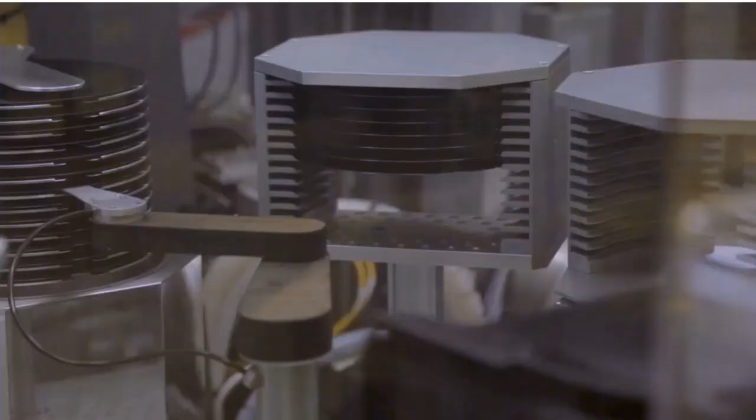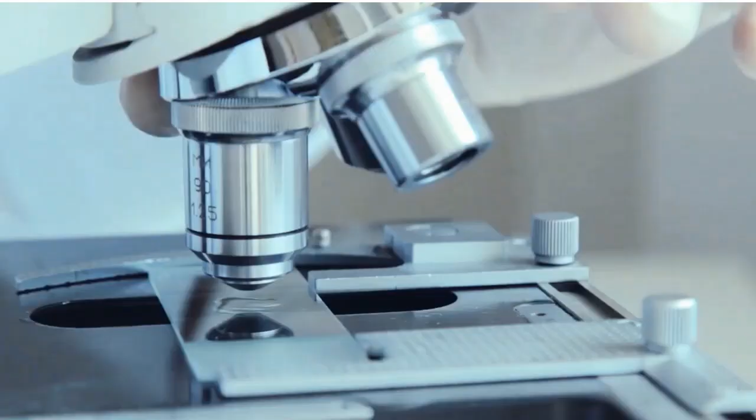We offer a wide range of materials such as glass, electronics, chemicals, and ceramics. And operate in over 30 countries and regions with over 50,000 employees, working to provide essential products for day-to-day life. Our research and development team thrives to achieve a better society and standard of living. At any point in time, AGC has played a part in supporting society, providing unique materials and solutions.

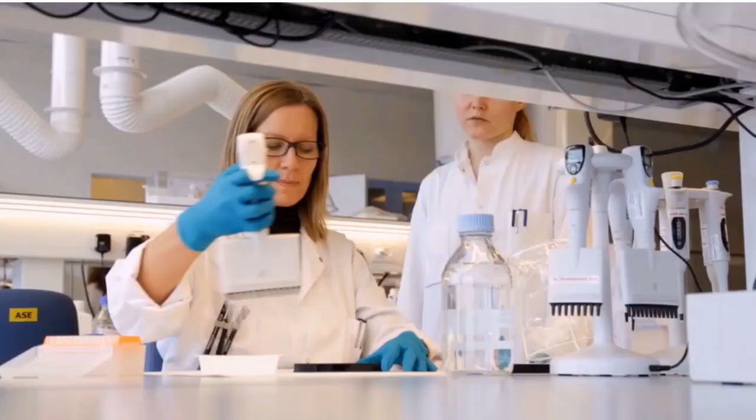Our glass is used in buildings and vehicles around the world. Our chemicals business offers a wide range from daily products such as baking soda to materials used for iconic buildings around the globe. Furthermore, providing solutions to advanced medical care and expected food shortage issues. Our display glass enables clearer images. By utilizing a wide range of technology, AGC contributes to the development of the electronics industry. By providing unique materials and solutions, AGC is always around you, supporting people's lives anywhere in the world. AGC.

AGC Incorporation's mission. AGC has been a forerunner since more than a century now. It is due to the planned mission and vision of the firm that they have always led the market and business. The mission of the firm is to make AGC an essential part of our everyday world. Its unique materials and solutions make people's lives better around the world every day.

AGC aims to be the first choice solution provider for its customers by building a long-term trusted relationship with them. The company believes in shared values among employees and customers. It aims innovation in technology, products and services beyond conventional concepts and frameworks. It is constantly working to improve all aspects of operations and services.

Besides, shared values in diversity, integrity, and environment also hold importance in AGC ideology. Respecting cultural, ethnic, and national diversity has been the main motto of AGC. This helps the firm build open and strong relationships with not only employees but also stakeholders and customers. AGC holds the spirit of never taking the easy way out, but confronting difficulties. This was given by the founder Toshiya Iwasaki and has been handed down since.

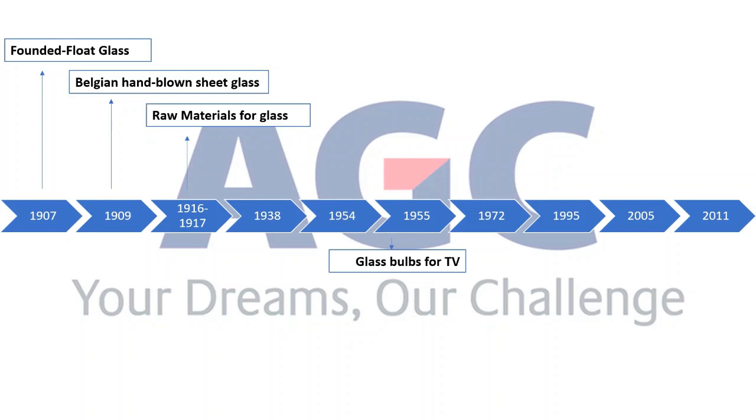Let us now look at the evolution of business and product technologies at AGC Incorporation. When Asahi was established in 1907, only float glass manufacturing took place in the plant. In 1909, Belgian hand-blown sheet glass manufacturing started in Asahi in Japan for the first time. With time, Asahi started manufacturing raw materials required for glass manufacturing, like long-lasting refractory bricks for melting furnaces in 1916, and soda ash production in 1917 when the headquarters were shifted to Tokyo. These new production lines led the firm on the road to being self-sufficient for production of glass.

In 1938, production of tempered glass and laminated glass was commenced. In 1954, the firm started manufacturing double glazing pair glass, an insulating glass of 2 or more window panes separated by vacuum or gas to reduce heat transfer. In 1955, manufacturing of glass bulbs for television picture tubes began in Japan.

In 1972, the Asahi Guard water and oil repellent was developed and has been a trademark of the Asahi Group ever since. Drawing on fluorine's extraordinary properties, these chemicals provide excellent protection and durability against water and oil. In 1995, the production of glass substrate for TFT LCDs began.

Moving to 2005, the sale of automotive glass that blocks infrared rays had gained momentum. With the enhancement in technology, AGC launched the worldwide sales of Dragontrail glass in 2011, used for smartphones and tablets. This glass is also a trademark product of the AGC group.

Further, the next generation automobile refrigerant with low environmental burden, HFO 1234yf, was manufactured and sold by AGC. In this way, from a small separating unit to production of next generation technologically advanced goods, AGC proved to be a pioneer in the market. All this success was possible because AGC ensured that its products not only meet global demand but are also long-lasting and environment-friendly. Let us now look at the management of AGC Incorporation.

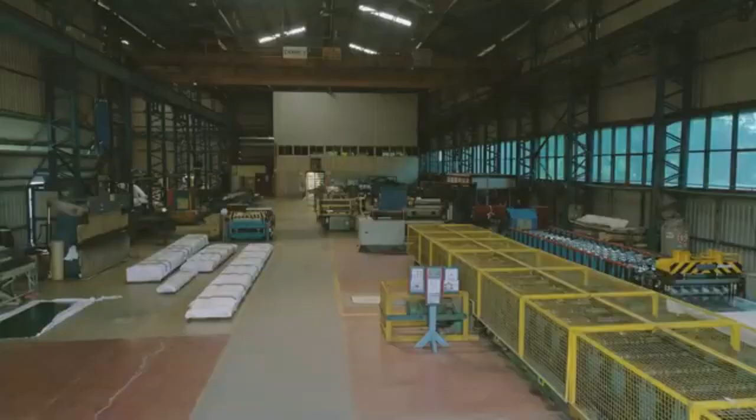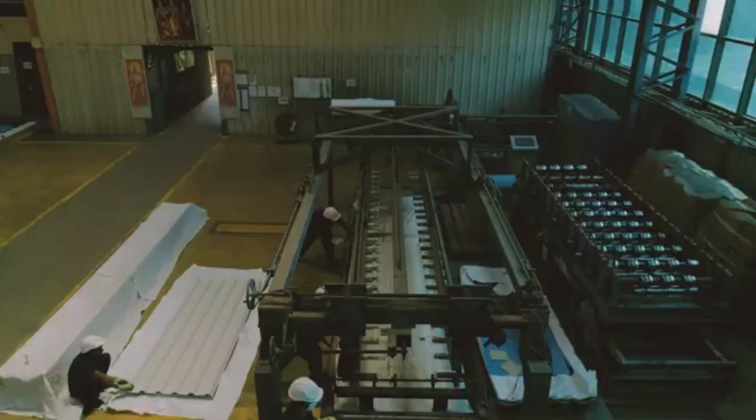Let's take a tour of the Taloja plant. The AIS Taloja plant has installed capacity to produce 550 tons of glass per day, which will help the company increase its overall production capacity by around 60%. According to AIS, the new Taloja plant is extensively and highly modernized, equipped with the latest in glass manufacturing technology. It will have the capability to produce high quality value-added glass for both architectural and automotive glass segments.

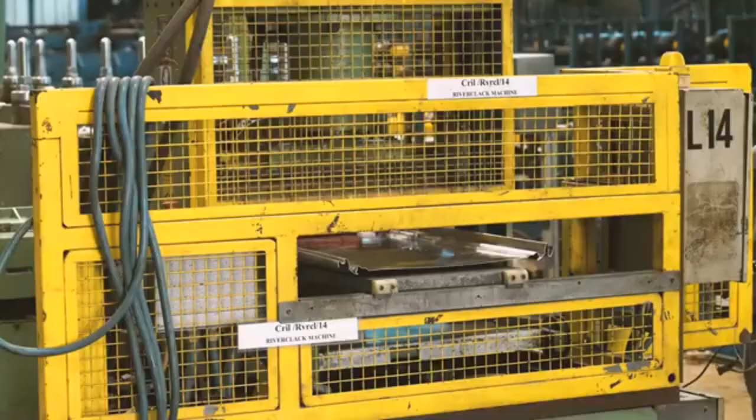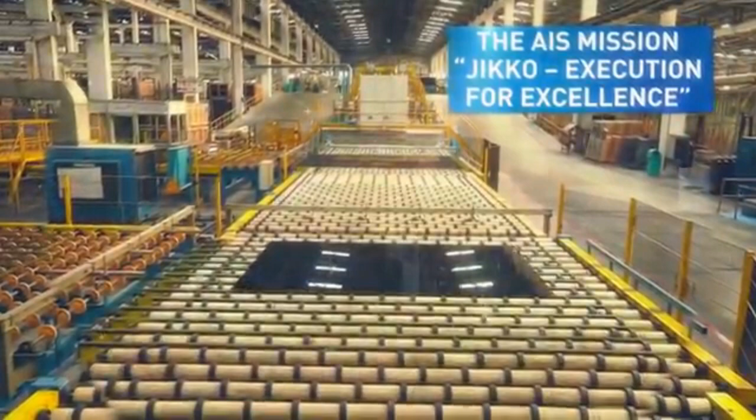Our mission is to transcend the norms and achieve excellence with all our glass products and solutions. Our entire manufacturing process is streamlined, calibrated and perfected to the highest standards of quality.

AIS Clear is a high-quality clear glass characterized by high precision flatness and uniform thickness, ensuring perfect clarity of vision and a brilliant lustre. It is available in a variety of thicknesses and sizes. AIS tinted heat-absorbing glass absorbs 30 to 45% of the sun's heat, enabling greater comfort and enhanced aesthetics. It is available in a variety of colors, sizes and thicknesses.

AIS Krystal is India's only branded frosted glass. It obscures the view while allowing light to pass through, making it ideal for privacy and aesthetic appeal.

AIS Opal is India's leading energy-efficient and heat-reflective glass brand. It is available in a range of vibrant colors. AIS Opal's solar control properties make it the best choice for exterior glass and also for various aesthetic applications.

With a 77% market share, AIS Auto Glass products and solutions can be seen on India's best vehicles across the automotive segment. The range of products and solutions include laminated glass for car windscreens, tempered glass for side lights and backlights. Besides offering premium quality laminated windshields that are strong yet lightweight, they offer a range of other value-added products that guarantee driver visibility and safety.

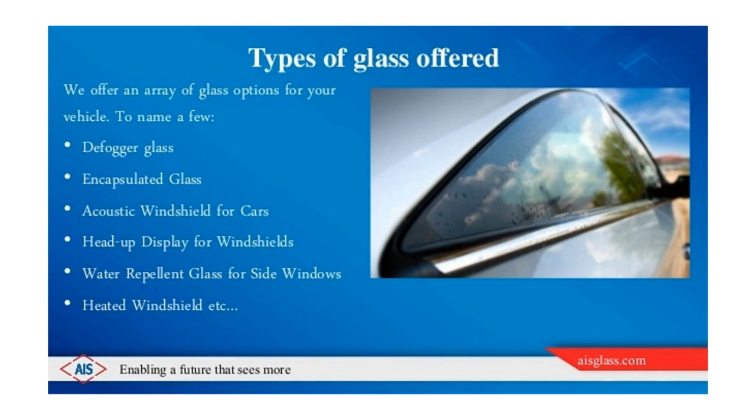From rain sensor windshields that help reduce distraction while driving under a sudden downpour, to heated windshields that automatically melt snow settling onto the glass surface, and much more, AIS premium range of value-added glass products will add value to your driving experience.

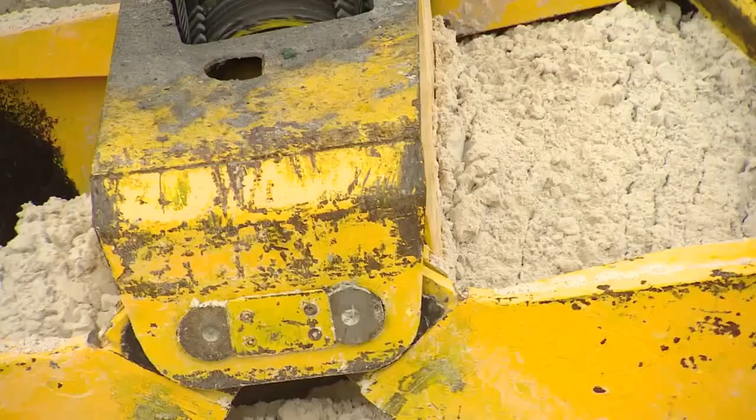Now we will learn in brief about the float glass manufacturing process. The basic raw materials are highest quality of soda ash, limestone, dolomite and recycled glass, also known as cullet, which are added to the mixer. Main objective is to select raw material which gives minimum batch cost and good quality which does not jeopardize furnace life.

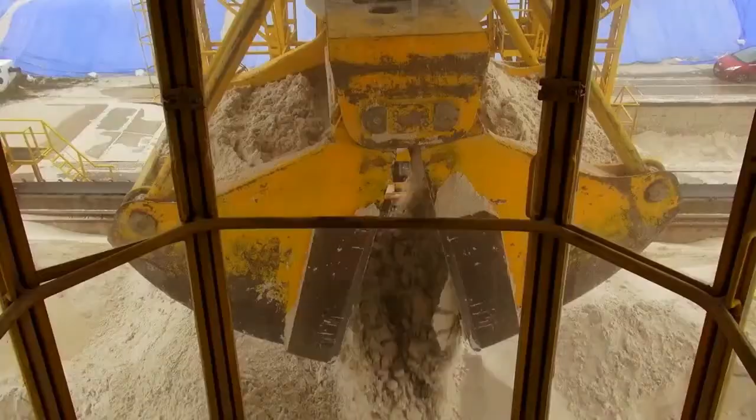Raw material mixture enters the furnace where it's melted at 1500 degrees Celsius. A cross-fired regenerative type of furnace is used. Fuel is natural gas, with 6 ports on each side. The cycle is reversed every 20 minutes.

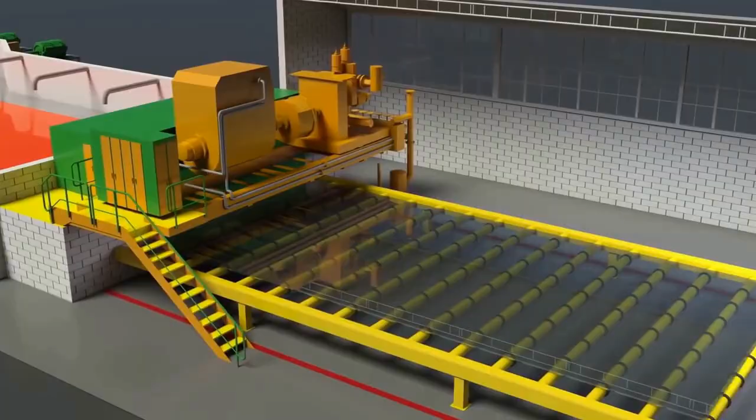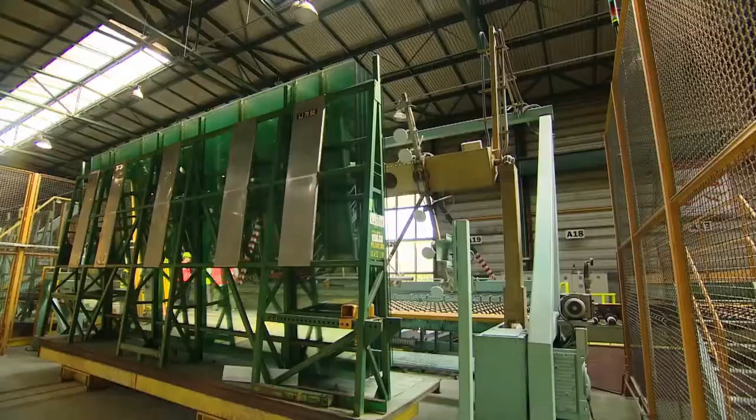The final bath product is a continuous ribbon of specific thickness which goes into the lehr section through lift-out rollers for annealing. Then glass is cut by diamond blades that slide across the surface. It is then inspected for defects and bubbles by an automated scanning process that rejects anything not meeting specifications. Glass sheets are lifted and placed in stands ready for shipment and delivered to the customer in perfect shape.

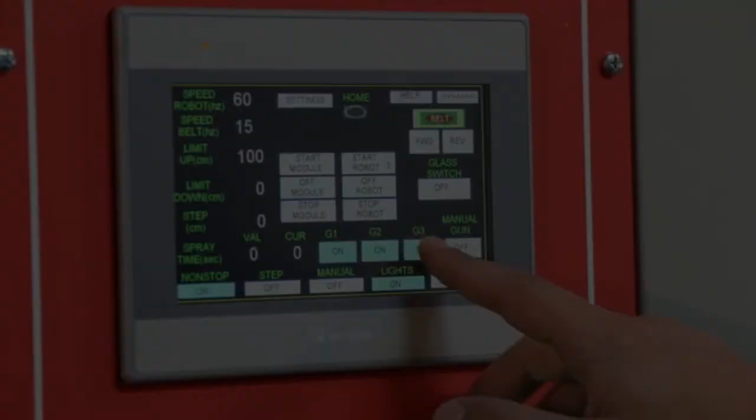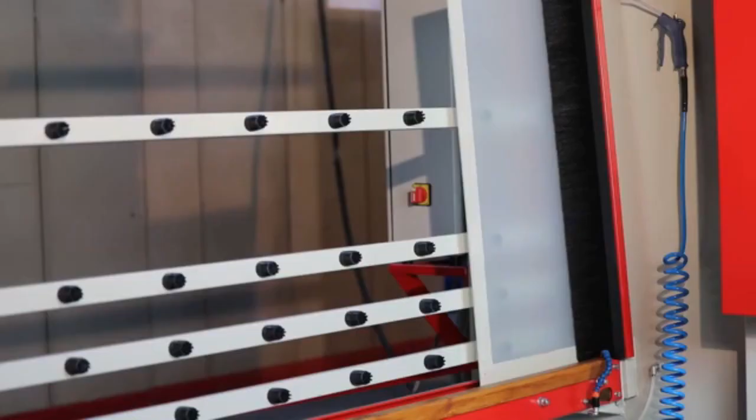Frosted glass is a clear sheet of glass that is turned opaque through the process of sandblasting or acid etching. Because of light scattering during transmission, glass comes out as translucent, obscuring visibility even as it transmits light. Sandblasting usually uses a high-speed machine that blasts sand down on the glass panel to achieve the look. The advantage of using the process is it can be completed in a decent amount of time and designs are readily available.

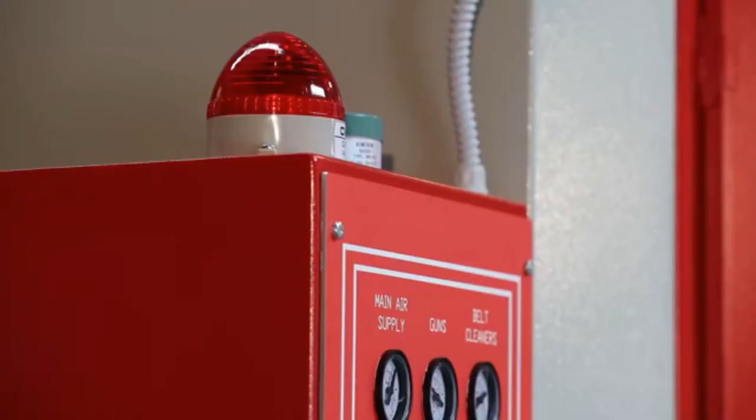Frosted glass is made as per customer requirement, plain or design. They make frosted glass from 2 mm to 12 mm, 35 metric tons per day. In this process, we require good quality raw glass, but sometimes we face raw glass rejection issues due to new manpower, raw material issues, or poor raw glass quality. The impact was that production was not achieved as per schedule, and there was an increase in process cost.

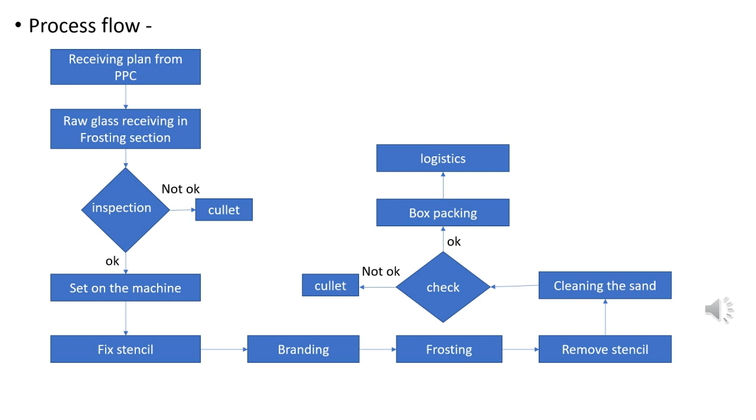We are going to look at the systematic steps in which Asahi resolved these problems and increased their productivity significantly. The team's objective was to reduce raw glass rejection in the frosting process, reducing process cost through improved glass quality. The team conducted a brainstorming session and came up with several issues that possibly lead to rejection of raw glass.

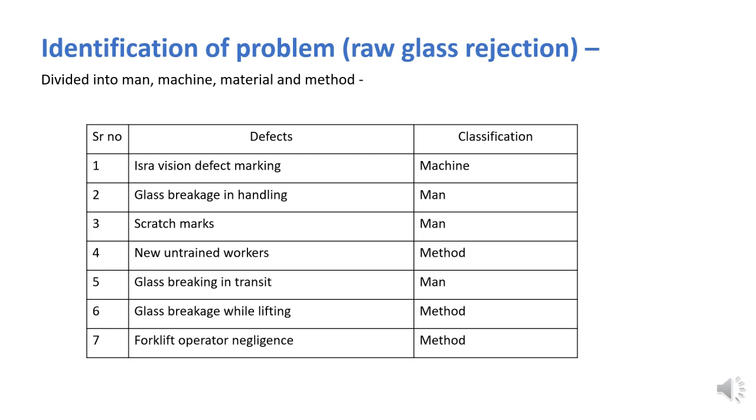Identified problems were divided into categories: A, can be done by the team itself; B, involvement of other department required; and C, management approval necessary.

The team solved safety-related problems using Kaizen. The table shows the problems that the team has identified. They identified the causes and classified them into man, machine, material, and method.

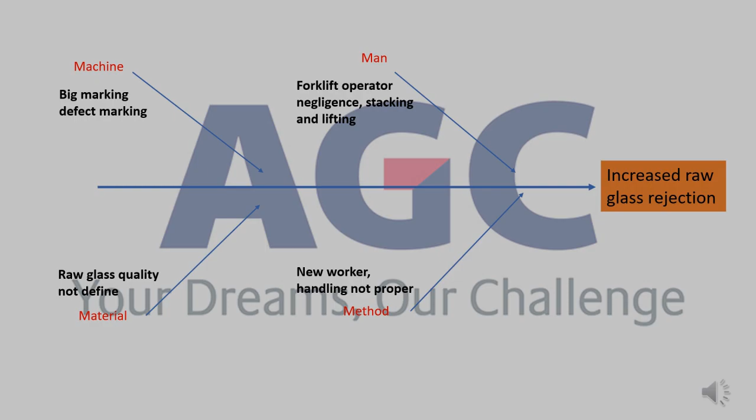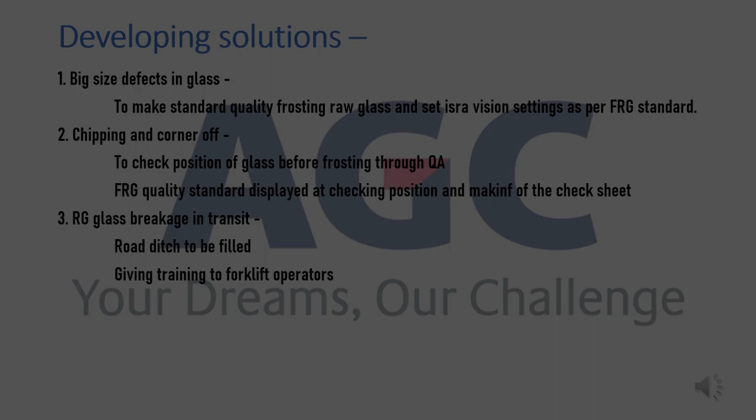After getting the data, the team conducted another brainstorming session to come up with solutions. They decided to make a standard check sheet and also automate the scanning process parameter as per defect size to avoid raw glass rejection at the frosting process. Training was given to forklift operators to avoid glass breaking in transit and lifting.

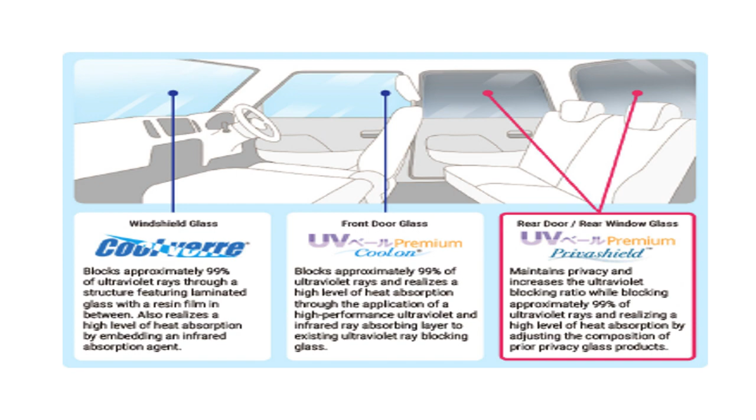AGC, since its inception in 1907, has always focused on sustainable growth and development. The company undertakes several CSR activities that benefit not only society but also the environment. Examples of such activities include energy saving glass for automobiles, light collecting solar power generation modules, and energy saving architectural glass.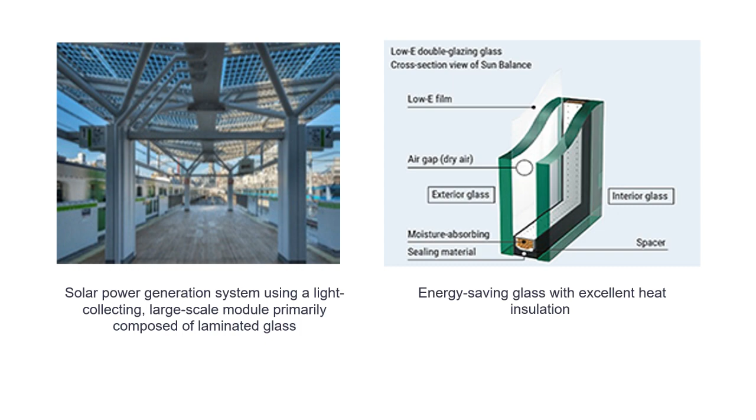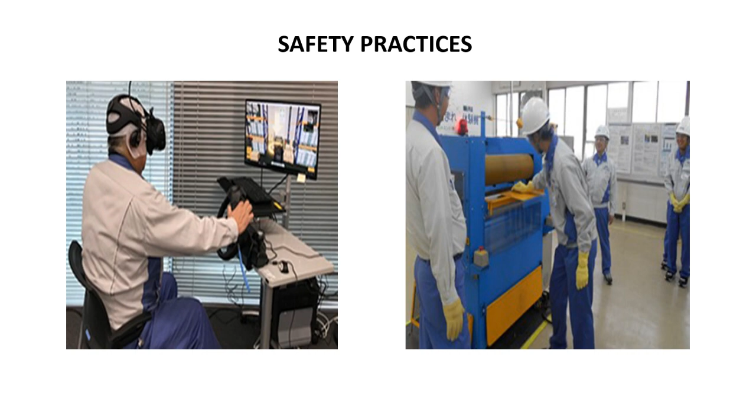Through the application of the AGC Group's basic occupational health and safety policy, and implementation of a plan-do-check cycle, they constantly improve the workplace environment. In particular, they also conduct risk assessments with a view to reducing significant risk. All these initiatives suggest that the company is constantly taking steps to make the world a better place.